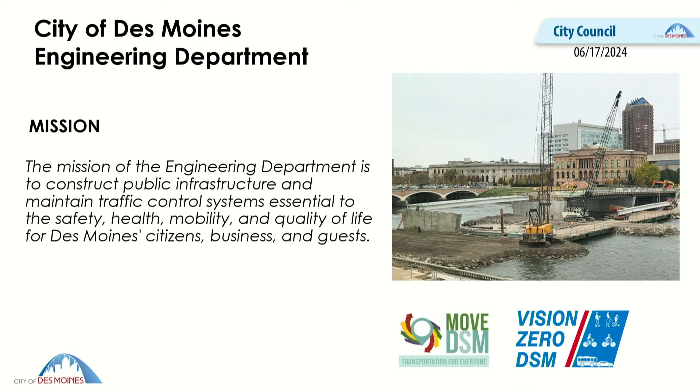We've got 101 staff, divided into 3 divisions: traffic and transportation, design and construction, and contracts and real estate.

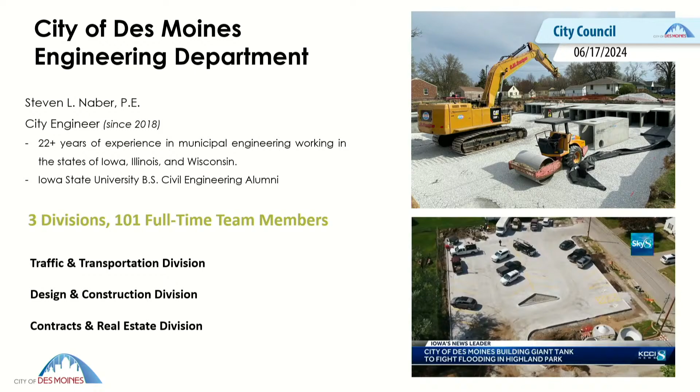Our traffic and transportation division is about 40% of the group. They focus on the planning, programming, and engineering side of things, from doing engineering studies, traffic signal timing and operations, and managing things like our traffic calming program. Notably, MOVE DSM, our transportation master plan, as well as Vision Zero, our safety action plan.

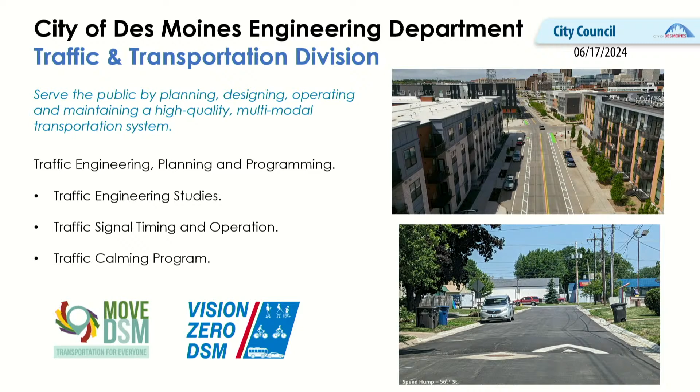We've also got a team involved with our permit development center doing site plan reviews from a traffic standpoint. We don't manage street use events, but we have traffic folks involved when street use events involve street closures, helping work on detours. We respond to about 200 vision obstruction complaints a year, when folks pull up at an intersection and have trouble seeing. We have folks go out and work with property owners to mitigate. And on our main city website, we have a thing called Find Closures, where folks can see where street closures are. We have team members managing that as well.

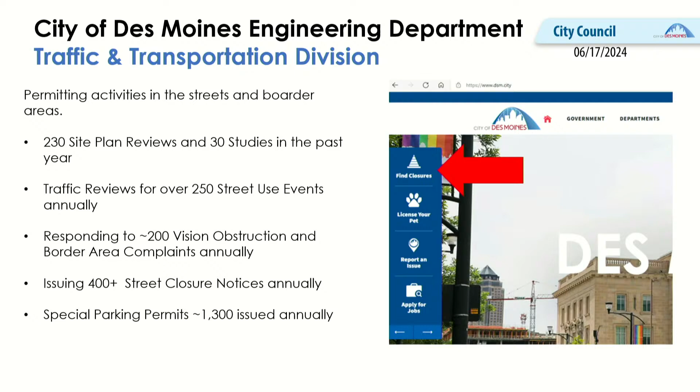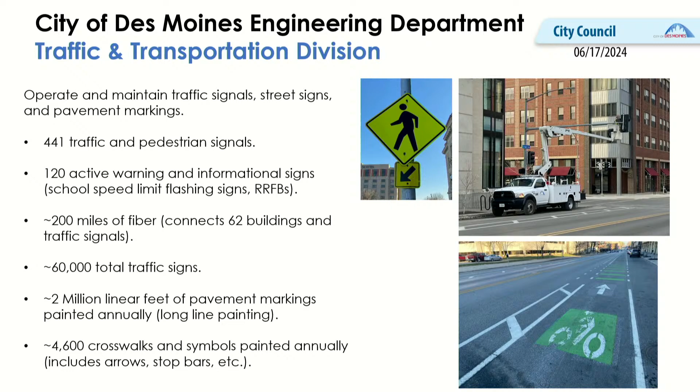We also have a large team of folks out maintaining the infrastructure itself, from 441 traffic and pedestrian signals, to 120 active informational signs. We've got 200 miles of fiber, 60,000 signs, 2 million feet of pavement markings, and 4,600 crosswalks and symbols that we all paint every year. So team members are out doing that within our department.

Also, we have the parking systems. That includes 3,400 on-street metered parking spaces, as well as the 7 parking garages. Plus we are leasing a parking garage floor at East 4th in Des Moines, and also managing the city skywalk pieces, the skywalk corridor.

The pieces that go through the private buildings are privately maintained, but we as a city have the stuff over the public right of way, like the bridges, and then we also have some skywalks that go through our parking garages that we're responsible for as well.

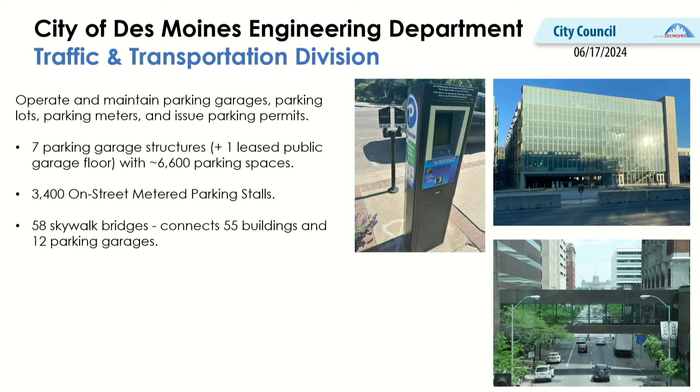Our design and construction division works like a consultant to the rest of the city. For example, if our parks department wants to build a spray ground, our parks department will plan it out and give the vision for it. Then our team will actually do the detailed design, prepare the construction design documents, bidding documents, design it, bid it, and build it, overseeing the construction as well. So that's one example.

If our public works department has a flooding issue they want to address, or maybe they want to provide sewer service to a certain part of the city that isn't there, they would say we want to provide sewer service here to this area, and then we would go through and design and size the sewer accordingly to that area, and oversee the construction as well.

So, do you charge each department when you do those types of services, like for parks and public works? Do you charge back to the other departments? That's a great question, Councilman Gatto is right.

Actually, this whole staff right here charges to the capital improvement program. So when we have a page, say for McKinley Avenue reconstruction, our team members are part of that budget, charging to the CIP. So if there's a spray ground page in our CIP, they're charging to that as well, to the project.

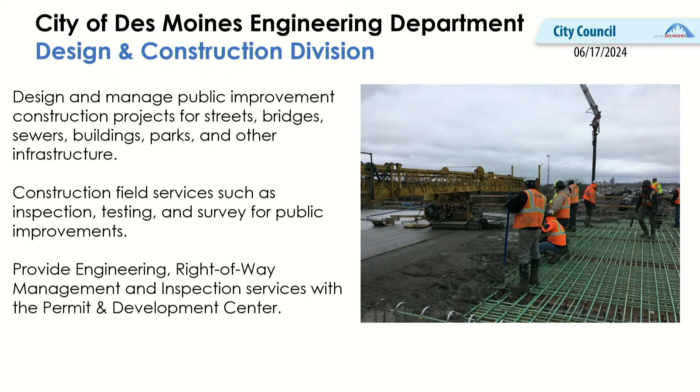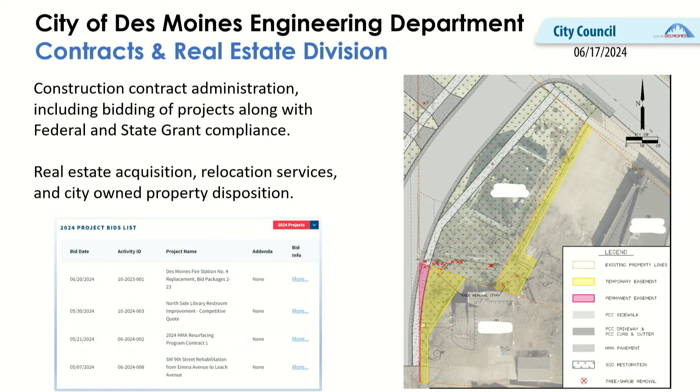We also have a real estate division that handles easements or permanent acquisitions, or even dispositions. You'll see on your agendas a lot of times we have alleyways that are platted on paper, but there's not really an alley there, so residents want to buy it, and we handle that process as well.

Okay, so just a little bit over our process. I do want to point out to our residents, if you go right on the main page, in addition to finding closures, you can also click on the projects map, and that is our city capital improvement projects. It's also on the engineering page, but obviously it's easier to find on the front page.

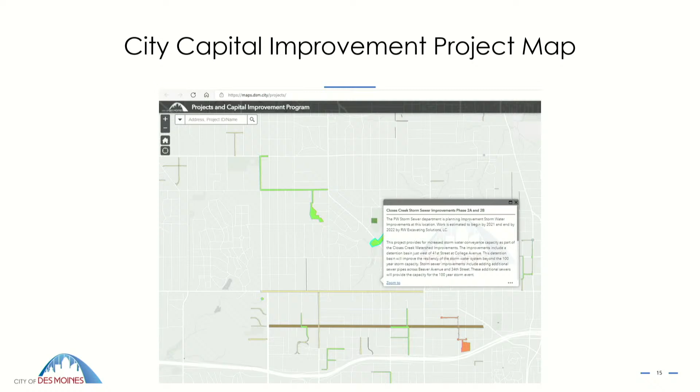That'll take you to a map that looks like this, and you can type in your address in the upper left-hand corner, and then it takes you to something like this, and you can click on these little icons and it pulls up what the project is. It tells you a little bit about it, as well as, I know this is tough to read with the white, who to contact directly, and even the reference to the capital improvement page from our CIP, so folks can see how it's funded.

So this is an older graphic, but I've always liked it for how a project gets completed. We hear from our residents. We have our budget process that goes from the fall into the early year and winter. Our council receives feedback from our residents. We've got PlanDSM, our comprehensive plan which is our vision, and GuideDSM which is our strategic plan. Those are the vision and strategic plan we use, and what I call implementation plans, such as MoveDSM, our transportation master plan, and our parks master plan.

We have neighborhood plans, and plans such as, I'll show you one example, our plan to maintain the parking garage structures. So those are what I call implementation plans. And then those are used by what I would call programmers. Our programmers are responsible for bringing forth projects from all that feedback from those plans and presenting them during the budget process that starts in the fall.

And then that all funnels into our city manager and finance office, who look at all the finances and figure out what we can do. Then, as you know, the city manager presents the budget in the early part of the year, and then it's ultimately approved, typically in March. This year it was in April because of a change from our legislature in when that was approved. So that's in general how a project is brought forth, and you can see all the different departments that are considered programmers that bring forth projects.

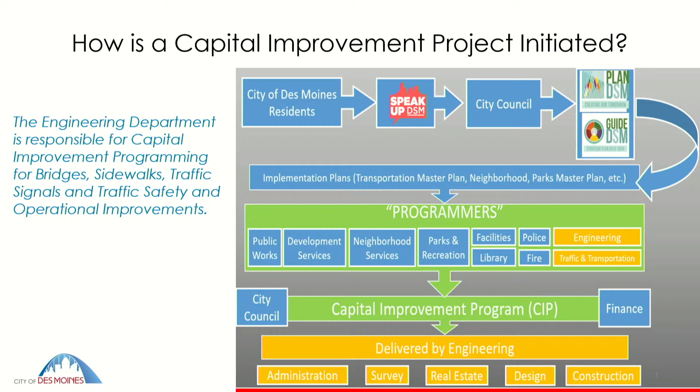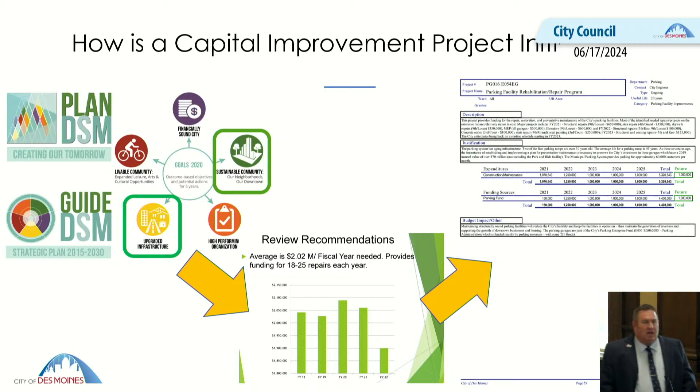So just an example, I mentioned this before. We have our strategic plan that we want upgraded infrastructure, we want to maintain our infrastructure. We had done an overarching implementation plan for how we maintain our parking garages structurally, and then we use that plan to put money in the CIP in the parking facility rehabilitation repair program, and that's how we come up with our budget and what we're doing. Then, of course, you'll see projects that come out of that. So this is just an example overview of how projects are created.

Then once we get a project in the capital improvement program, there's quite a process from there. Our city council adopts the capital improvement program every year and approves it. Then once we get a project, we finalize the scope and start the engineering process, assemble a project team. If there are private consultants needed for specialty work, or due to a workload effort, then we might bring a private consultant on. Then we have some preliminary engineering, environmental work, survey work, and there could be real estate actions needed as well.

Ultimately we follow state code in how we bid projects. We're required to order construction, our city council is required to order construction. We have our bidding process, and then we have a hearing to award the construction contract. So you can see the different touch points throughout a project, and then ultimately we build it, and then we have to accept it as well.

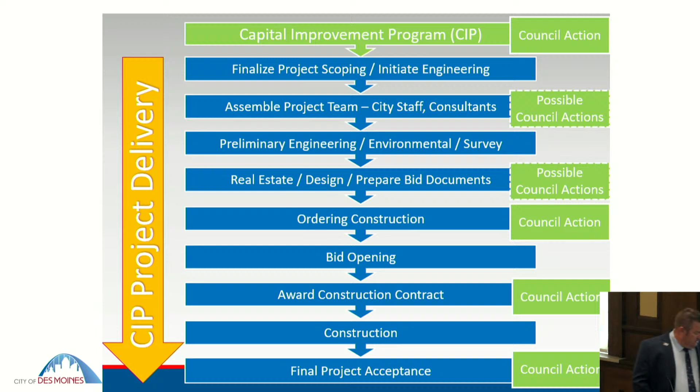Our bidding process isn't short. This is a schedule I put out to our team for where our milestones are, since we have to hit certain bid dates. Essentially there's two months of bidding, and then if there's real estate involved, it typically takes about six months to go through real estate. So that's eight months, I'd say, from final design. If you have a final design and we have plats and know we need right-of-way or easements, it's going to take us at least eight months from that process as well.

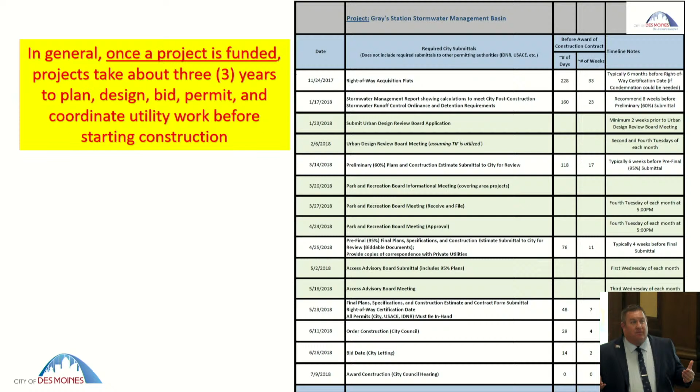This is not this table, I just pulled it as an example and I expect no one to read it. But what I wanted to show you is it's actually a schedule for the Gray's Station stormwater wetland basin.

Some folks might say, well, you're digging out a hole and then seeding it with wetlands, but for that wetland alone we had real estate involved because we had property transfers. We went through Urban Design Review Board, Parks and Recreation Board, and Access Advisory Board because we've got a trail around there. So there's a number of submittals and processes throughout what some might think is a simple project, and that's 33 weeks of going through that.

In general, the rule of thumb, and I've worked through communities across the Midwest, Illinois and Wisconsin, 3 years is generally what it takes to design, bid and build and permit a project, and coordinate utility work. So once a project's funded, generally 3 years is kind of the normal rule of thumb. Can we do it faster? Absolutely. Can projects take longer? If they're more complex, certainly they can. But that's the general rule of thumb.

You don't think this is maybe a little excessive for projects, with all these steps in here? Maybe we can simplify it a little bit, or cut some of these steps out, cut some of the red tape out, so we can actually internally do things a little bit quicker?

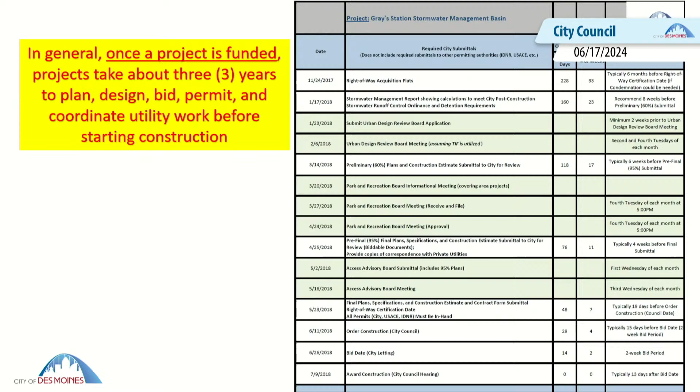But between all the boards, you're talking, they basically could do it at the same time, right? Correct. So you've got 3 months from February through May that we're waiting to get to a board. Yeah, I'm looking at this, that's what I'm going through internally. What the general public is going to have to go through, they're going through all of these steps, might seem just slightly excessive, but that's my internal opinion. Outside we're obviously going through the same thing, which seems a little much for some simpler projects.

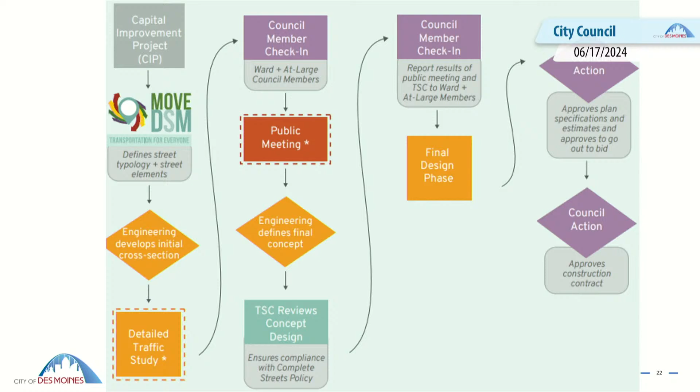This graphic is taken from Move DSM, our Transportation Master Plan. From our public process, it's always beneficial to get out to the public early on in the concept stage, before you get into the detailed design where we actually spend a lot of time detailing elevations and storm sewer sizing and all those construction documents.

We meet with the public early, and you see up there council check-ins. We check in with the ward and at-large council members before we go to the public. So this is our public process for a typical transportation project.

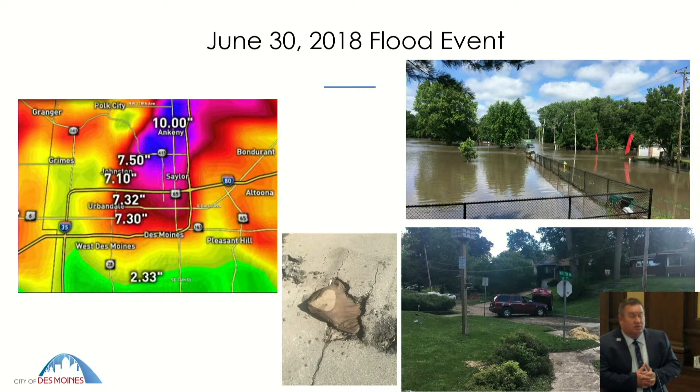So some of the capital improvement program highlights. This graphic, a lot of us remember, right? In June 30th of 2018, the power of water is incredible. Those cars obviously did not park that way.

That couch cushion - the water actually picked up the asphalt overlay, so it kind of created a wave effect, and that couch cushion was out of someone's house and ended up under there. So, a devastating event, to say the least.

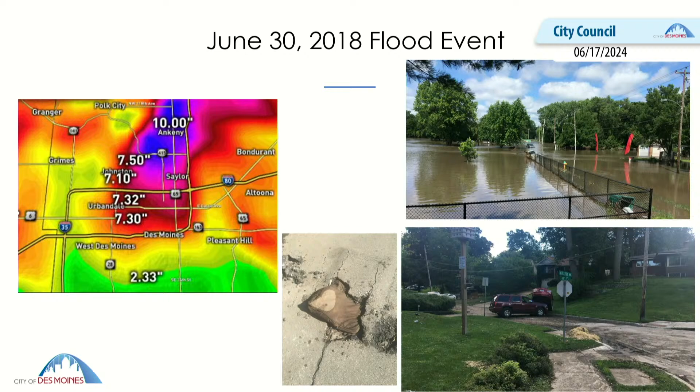In response, our council injected, I think it was 25 million in the range of stormwater money, to attack this. We set a goal to basically go from the downhill portion of Maquoketa Drive up to 47th and Holcomb in 5 years.

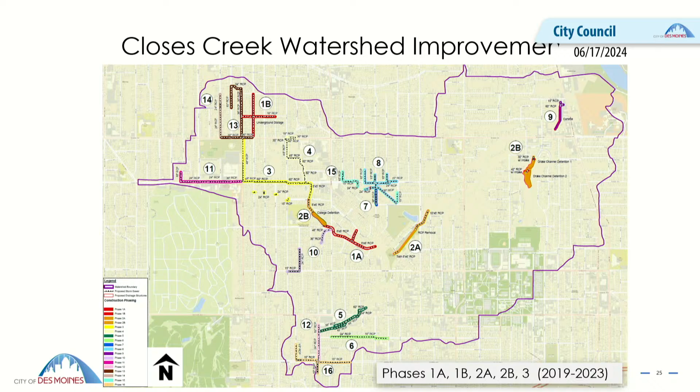So, in 2018, we had a lot of public meetings. I remember a lot of you in the front yards meeting with folks, and that was our goal - we're going to attack this in 5 years and get from Maquoketa Drive to 47th and Holcomb.

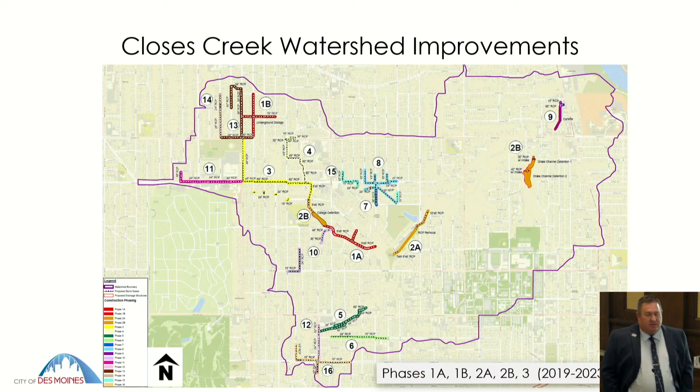And you say, why did we choose that? Well, that's kind of the main artery of this area. So I put these arrows - that is generally where the water is going to the Des Moines River. Our goal was to attack that main artery.

The old plan that was in place for a while was really more focused on conveyance - just conveying a large portion of stormwater. In 2018, when the flood events happened, our public works team and engineering team got in rooms and figured out how to inject detention.

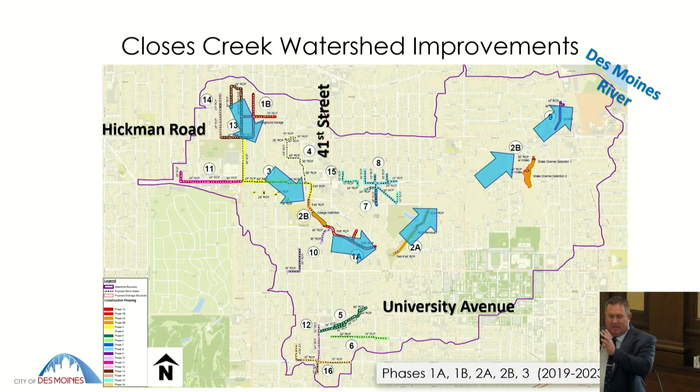What is detention? Well, conveyance is conveying the water. If I dump a small amount of water through a straw, the straw hopefully will convey the water. If I take a big pitcher of water and dump it through a straw, the straw won't be able to handle it, and it floods all over the place. Detention is if I attach the straw to a large bowl and dump the pitcher into the bowl - the bowl will fill up and allow the straw to drain out the water. That's how I've tried to explain stormwater detention.

So we implemented some detention facilities here. One of them is uniquely underneath 47th and Holcomb - these are 12-foot wide by 4-foot chambers underneath the street that actually store water. This was kind of a low area, if you will. So now instead of the water being stored in people's basements and on the street, it's now stored as detention underneath the road.

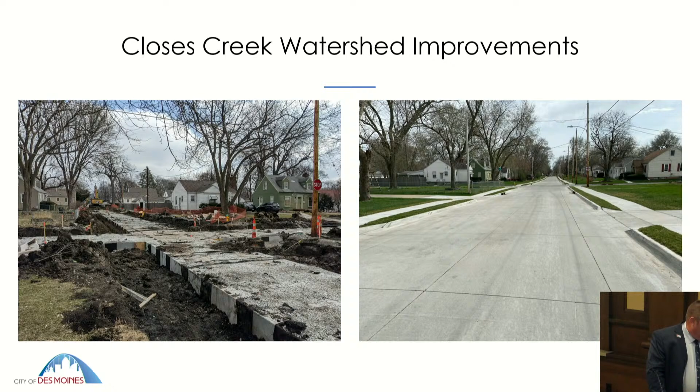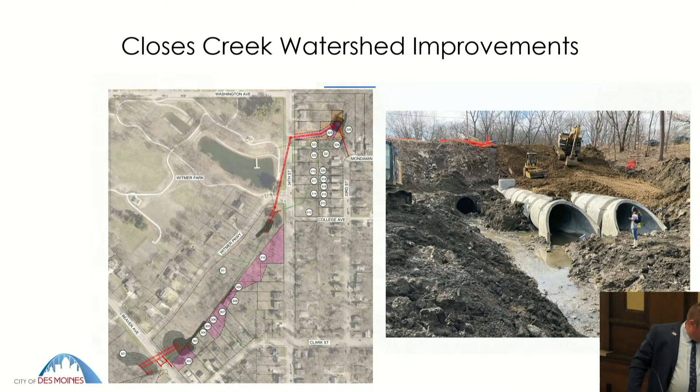And then talking about detention - we actually just got an email from a resident who was really happy about how our public works department is doing more native planting instead of mowing. It used to be just turf grass for detention basins, and they would spend money mowing them. Instead, we've switched to more native plantings, and I got an email from a resident so happy to see all the plantings that have bloomed in this stormwater detention basin at 41st and College.

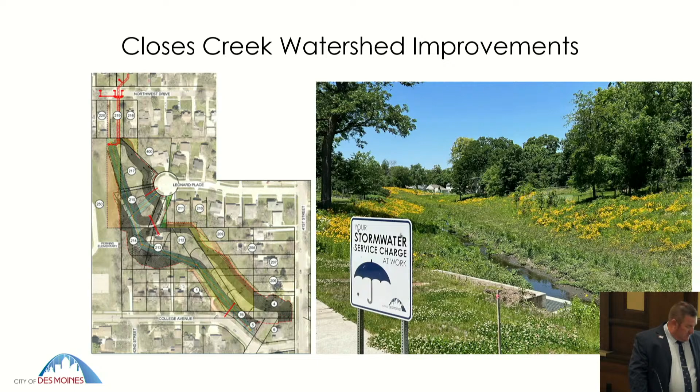Hamilton Drain, again, this is a similar concept. There was actually an old wood box called the Rocky Place Sewer. In some cases it's about 5 feet by 4 feet wide, and that's what was conveyed. The old wood box was the red line running across the screen there, and that was conveying the stormwater.

In some cases it was in okay condition, other cases it was not. I know Councilmember Westergaard had met with some residents who saw some locations that weren't. And so, of course, when that wood box gets overwhelmed, remember the straw concept, that's where the water's going to go.

This had flooding history enough that FEMA mapped a 22-acre portion of this land as a special flood hazard area, which mandated that if people had a federally backed mortgage, which most mortgages are, they have to get flood insurance, which is not cheap.

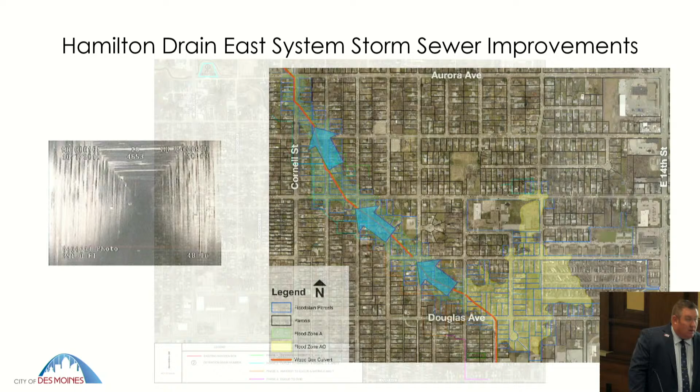Our public works team and engineering team got together, and the old plan was just conveyance, but the old plan wasn't quite reasonable. There were some sections where they had 3 12-foot wide culverts going down a street to convey the stormwater. Well, the street's only 25 feet wide, so that's not really a lot of room for that.

So we switched gears and added more stormwater detention. You can see some of the boxes in that area where we've injected stormwater detention to store water, slowing the rates downstream into the program.

So right here you can see our plan. The green is 100% complete, the blue is substantially completed. Right now we're in phase 3, which is the orange, about 60% complete with those sewers. All we've got left is the pink, which is the Hamilton Drain storm sewer improvements. There used to be a county drainage district called Hamilton Drain. It no longer exists, but we've kept the name for the drainage purposes.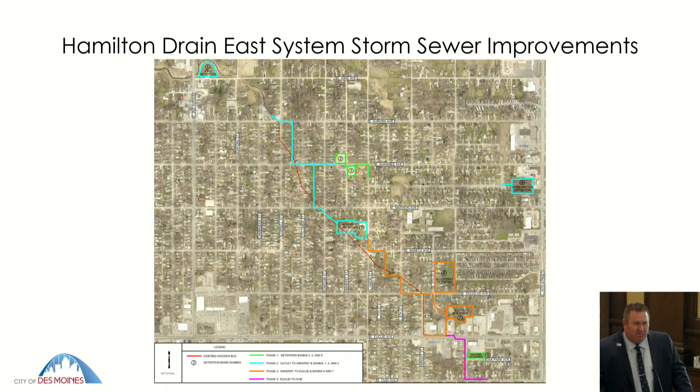Again, we had to get creative. There's not a lot of green space in our more established neighborhoods, so here there's actually 2 big parking lots that a church had. We worked with them and said, hey, you get brand new parking lots if you let us store 1 million gallons of stormwater underneath them. There obviously are easements there so they won't build buildings there, but churches generally will stay in that land use, so those parking lots, they got new parking lots.

With it, we also were able to clean up sidewalks. There actually wasn't a lot of sidewalks in this area, there were a lot of sidewalk gaps, so we're able to clean up this whole area with this project, as well as put in a huge amount of storage facilities.

We've also been working on flood mitigation along our rivers as well. This is our plan for the flood mitigation program, levee alterations program. We've been funding a lot of that with state tax money from the flood mitigation program through the state. The green, phase A, was complete, and I'll show some graphics of that in a bit. That's basically from the confluence on the Des Moines River upstream to just north of about where we are.

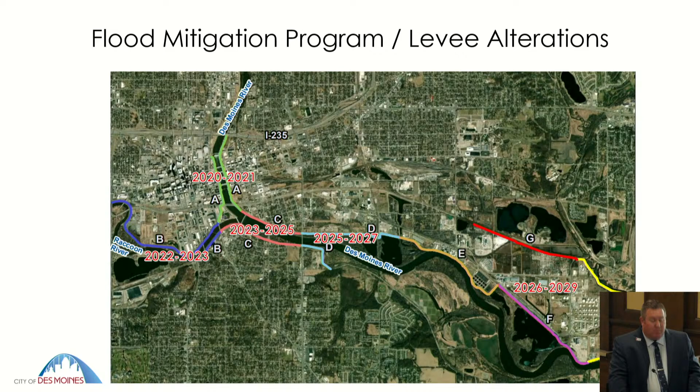We've also got phase B in blue, which is about 90% complete. That goes from the confluence upstream of Raccoon. And we're currently under construction, about 50%, maybe a little more complete, with phase C, a large phase from the confluence down to southeast 14th Street. I'll show some graphics of what some of these improvements are here.

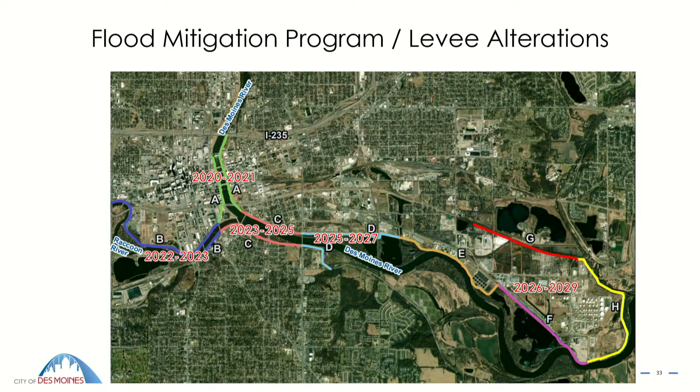Along with some of the phases, we also did some interior drainage work. We've replaced and upgraded a number of pump stations. When we talk about pump stations, we've got the levee system, and if the river's up and it rains behind the levee, we've got to get the water out still.

So this is a neighborhood south of Martin Luther King Jr. Parkway. There was flood history here, so we took some property that wasn't being used, part of it next to Cohen Park, near the fountain that's been there a long time, and put in a stormwater basin. We got together with our parks team, who did an awesome job putting a little sidewalk path around it and making park improvements along there. Not only is that area much safer from a flood mitigation standpoint, but we've got a really cool amenity there planned by our parks team.

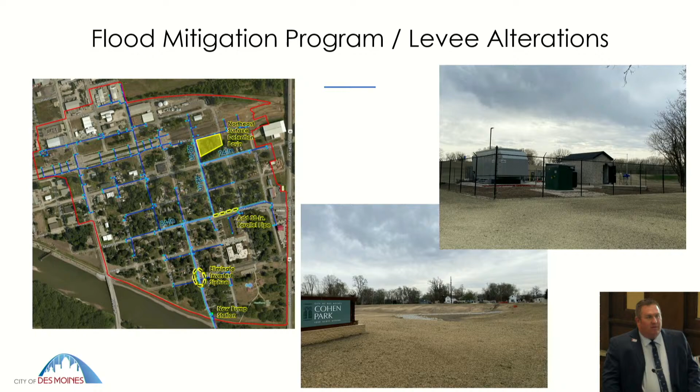We've also done things like levee raises, and the bottom graphic shows what that is. We've elevated our levees and flood walls to have a buffer, or freeboard, above what is considered the special flood hazard event. Typically it's 3 to 4 feet. We actually put in a bit more buffer, adding another 6 inches, or even using the Corps standard, which is the 90% probabilistic event - a modeling accuracy approach they use to set the height.

So we've not only raised our levees - you can see on the left that's a levee south of Martin Luther King Jr. Parkway - we've also replaced some levees due to condition, that's by the red bridge, Principal Riverwalk Red Bridge there. And we've also just raised some of the walls, putting a cap on the wall to build some of that freeboard.

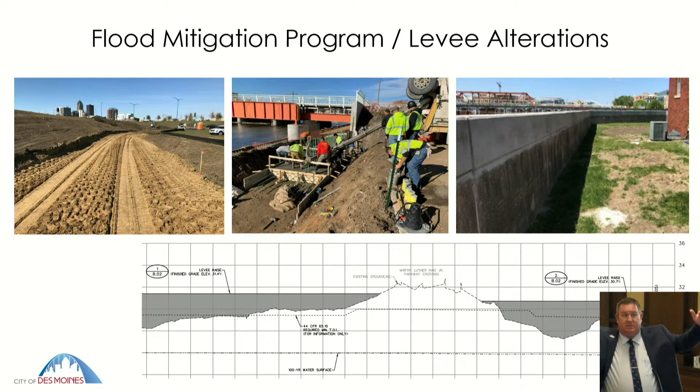This is not only to provide flood mitigation and reduce flood risk, we're also doing this to meet FEMA standards. If we did not make some of these improvements, there was a risk that FEMA would say we don't recognize the flood protection system, that it doesn't meet our standards, and they'd change the classification of the area behind it, considering it a special flood hazard area. So not only is this drastically reducing flood risk through mitigation, it's also reaching FEMA standards, and even exceeding that with some buffer above it. That's why we're doing this.

There are some other improvements here. We talked about gate wells - these are the structures our public works team closes when there's a high flood event, so the river doesn't back up through our storm sewer system.

We've also done some stabilization work - you can see that's on the Iowa Women of Achievement Bridge to armor the banks. So we not only armor the levee system and flood protection system on the front side because our river can cause scouring, we've also done improvements on the back side. There's groundwater that flows underneath the levees, posing a risk for undermining them, so we've done stabilization improvements and seepage drains to pull that pressure out from under there. Again, not just raising the levees, but making them more robust.

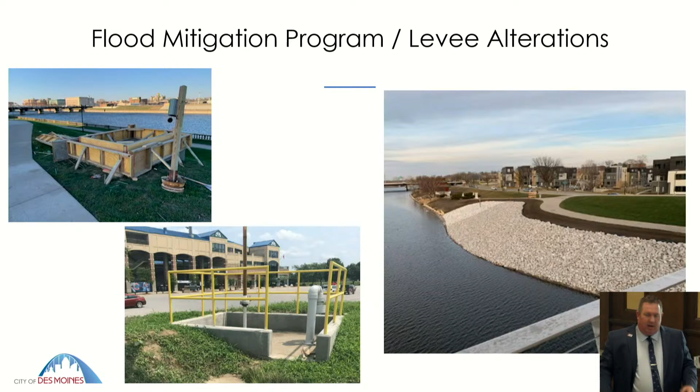Our closures are generally the most at-risk points in our flood protection system. This is our public works team now operating our new closures. The one on the left is the Simon Estes Amphitheater right out our window here, and the one on the right - if you go to an Iowa Cubs game - those walls are closures. You can see that's much quicker to install compared to what we used to do, which was having contractors bring in loads of earth material to close up these areas, which poses a risk from both a time and stability standpoint. So we're hardening these closures.

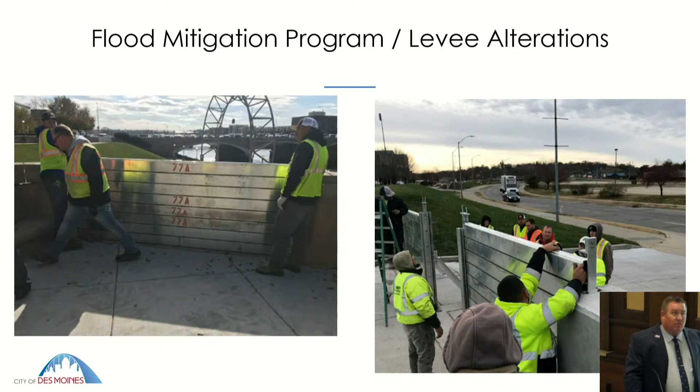We're very proud, as a city whose flag is modeled off of bridges, that our bridges are in great condition. As a statistic, we've replaced or rehabilitated 21 bridges in the past 10 years. We've got 52 of them. In 2013, we had 14 classified as structurally deficient - though I want to point out that doesn't mean they're not safe, it just means elements of the bridge are in poor condition. That's just a metric structural engineers use to classify bridges.

In 2024, we're down to 2, and one of them is Walnut, so I guess that one's gone - maybe it should be 1 right now. The other one is the Raccoon River Bridge, which we have in the CIP.

I should have probably not changed the numbers until we've actually replaced it and finished the project. So, I guess in hindsight, I shouldn't have.

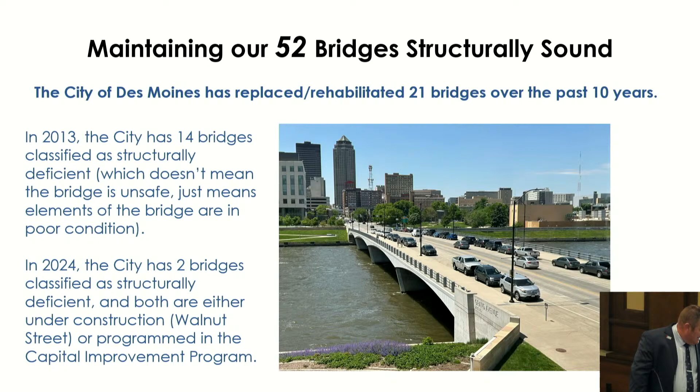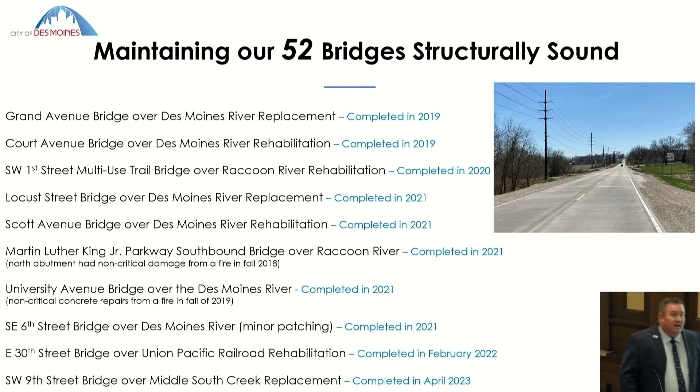Here's just a snapshot of all those bridges we've worked on in the past 5 years: Grand Avenue, Court Avenue, Southwest First, Locust, Scott, Martin Luther King Jr. Parkway, University, Southeast 6th, East 30th over by the fairgrounds, and Southwest 9th, all done in the past 5 years. We've also got some real recent ones, 2nd Avenue with 2 bridges there, Southwest 8th Viaduct in 2023, and Southwest 9th is coming. Guthrie Avenue is planned for 2025, Walnut's under construction, and then we've got Fleur Drive, as I mentioned before, in our capital improvement program as well.

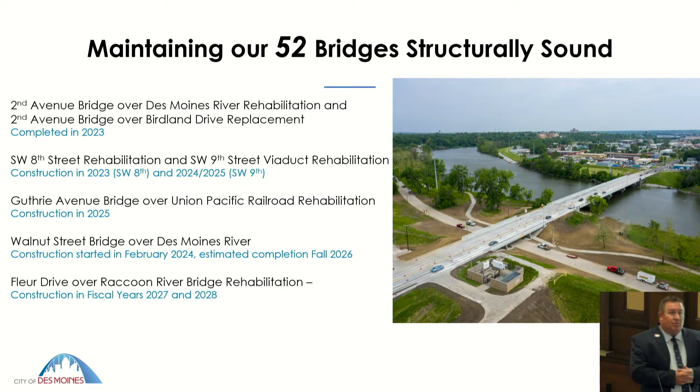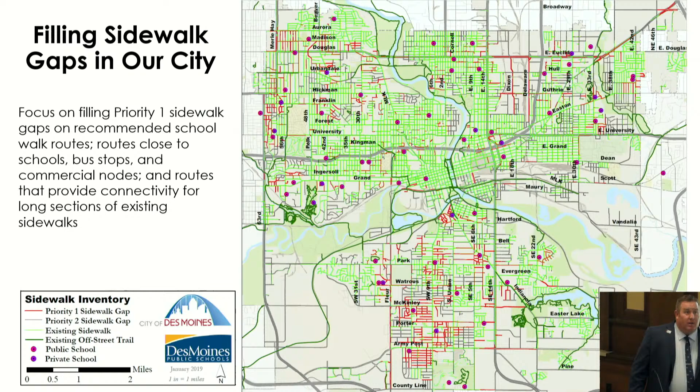Sidewalks, this was the start of it. We moved through DSM and laid out what we consider priority 1 sidewalks, those on recommended school routes, connecting to bus stops, commercial nodes, and long connections. This was a map across DSM, and the red areas are what we call priority 1 gaps. You can see some parts of our city obviously have more than others. So we put together a plan to attack those, creating a phasing effect.

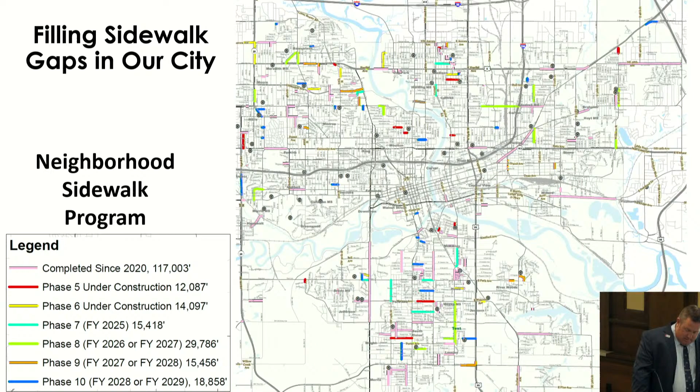I think this is kind of the overarching CIP, and I gave this slide a few weeks ago. Since then, we've made quite a bit of progress, over 27 miles in the past 5 years. And what's underway, under contract, or getting ready to bid, we're looking to be at 31 miles by fiscal year 2025.

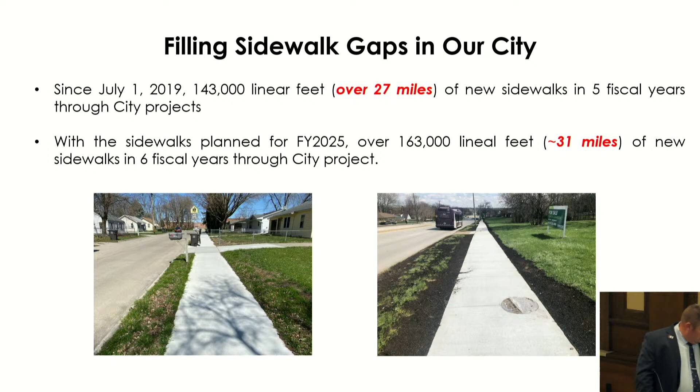To put that in perspective, if we keep on that pace, how long is it going to take us to get through the priority 1 sidewalks? Well, that would average about 5.5 miles a year, and we have about 180 miles total. So that works out to about 32 or 33 years.

So now we're talking about streets. This was Hubbell Avenue in 2017. You can see there were some obscure intersections. At the time, it was ranked number 4 in the state from a crash history standpoint on the state's list. You can see the obscure intersections, like at the top right, where if you're on East 38th or East Douglas, you could go to this weird intersection turning at an angle, or go up to East 38th to the north.

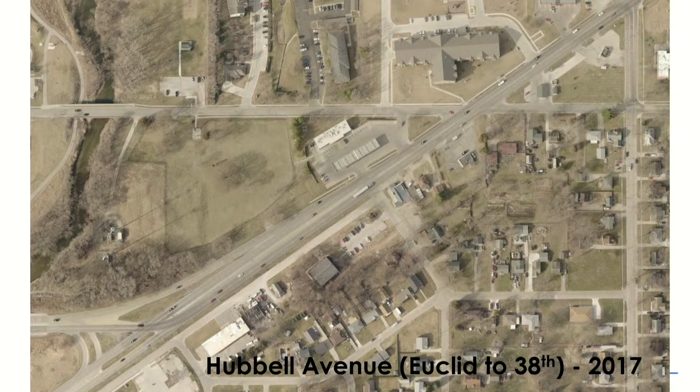Euclid also came in at a unique intersection. One of the challenges, to be honest, was access management. If you were at a gas pump at the QuikTrip, you could just leave your pump and go straight out, making a left-hand turn, which people did. It was not even a comfortable intersection to drive. Full disclosure, I live over in this area on Hull Avenue.

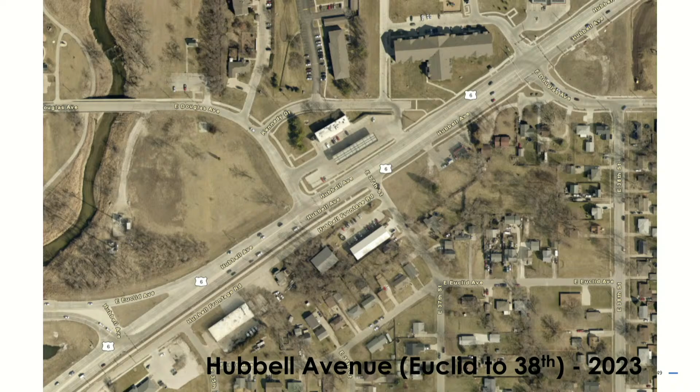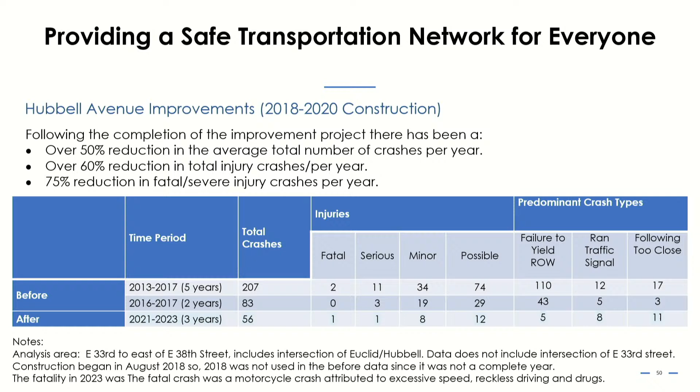And then the better part is the data. When we collected data before and after, we saw a 50% reduction in the total number of crashes, a 60% reduction in total injuries, and a 75% reduction in fatal or severe injury crashes overall. So I'd say that's a pretty successful project, and if you drive through the area, I think people definitely like it a lot better. Even the QuikTrip folks like it a lot better, to say the least.

Okay, so just an update on some of our larger corridor projects. Ingersoll Avenue phases 1 through 3 are done. Phase 4 is well underway and scheduled to be completed in the spring of 2025. Phase 5, from 31st to 35th, is scheduled for 26-27, and the final phase 6 would be 28-29, to all line up with the TIF funding, the tax increment financing set up to fund this.

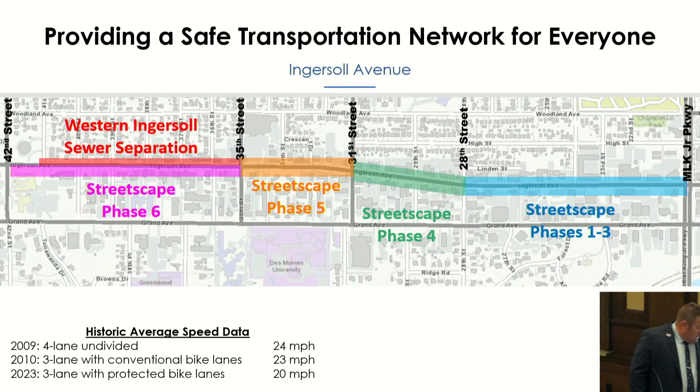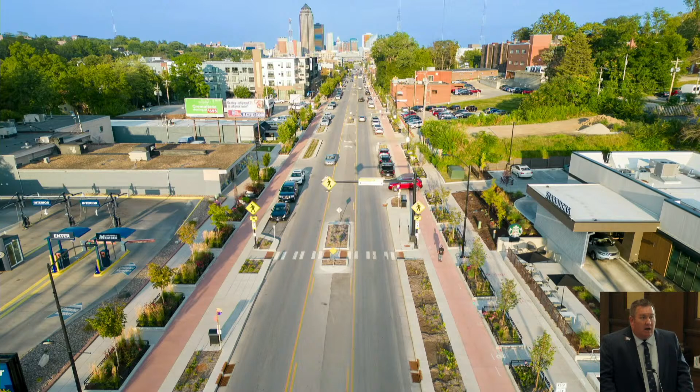Just below shows some speed characteristics there. The impetus for this is a lot of things. One, we've got dated infrastructure. The road itself was in poor condition. The pieces that aren't done, it is in poor condition. It's failing, so we need to completely replace the infrastructure from the dirt up.

Since we're doing that, we're also replacing a lot of the utility work underneath there. We have been finding lead services, so we have been replacing those lead service pipes to the businesses as we find them. We've been upgrading stormwater infrastructure, and the parking areas, you see how they're a different shade - those are brick pavers. The water is designed so it goes through the seams of the brick pavers and promotes groundwater infiltration and reduces that stormwater runoff.

I used to live over this area as well, and I remember when it rains, the water runs in a very sheet flow manner down the streets, I guess if I can word it that way. So we want to try and reduce that runoff, in addition to making this corridor safer for those that live and work and walk and play here.

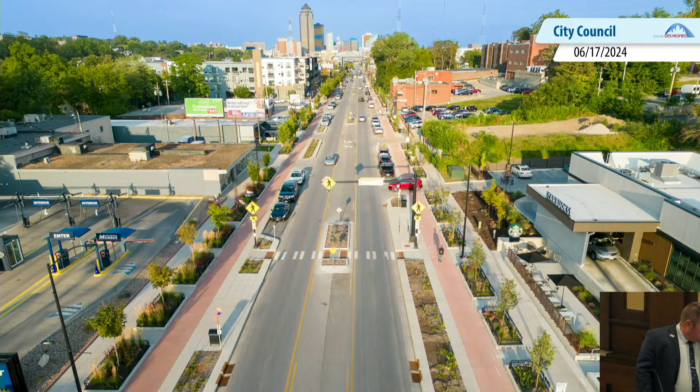So just another example - this was 2020 of Ingersoll Avenue between 24th and 28th Street. You can see the street width there. And here's today. Again, think about where's an area that's safer for all users, where's an area that you want to be. This, in my opinion, definitely makes it a lot safer, especially for pedestrians and folks in this area.

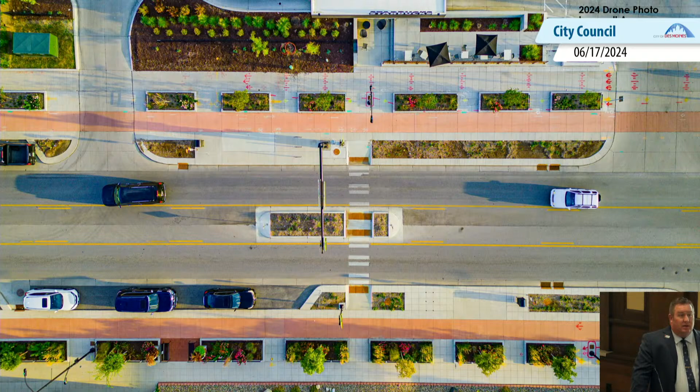And then we get the questions. I just want to show this when you think about design concepts, because it's a question that comes up a lot - why are there these curb extensions and bump outs? Why is there not a parking space right next to the driveway? It's not only for pedestrians and bicyclists and transit users, it's for the motorists as well, to see as they're exiting the driveway.

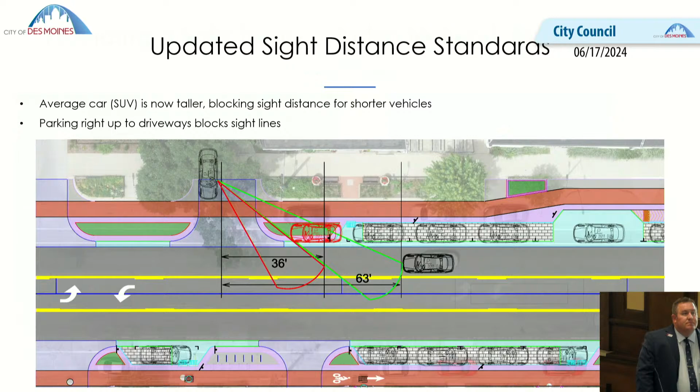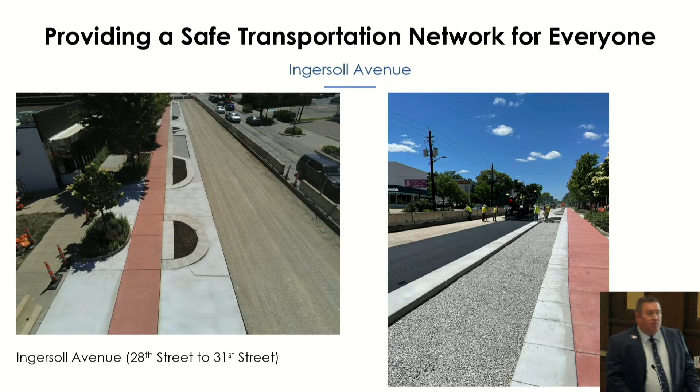And if you go out there today, this is kind of what it looks like. They pretty much got the east side done from 28th to 29th. They flipped over and they're working on the west side from 28th to 29th, and also working from 29th to 31st on the east side. This work is well underway - I think it will be completed, in my opinion, ahead of the spring, the May 2025 completion date, but that's the ultimate completion date for that phase.

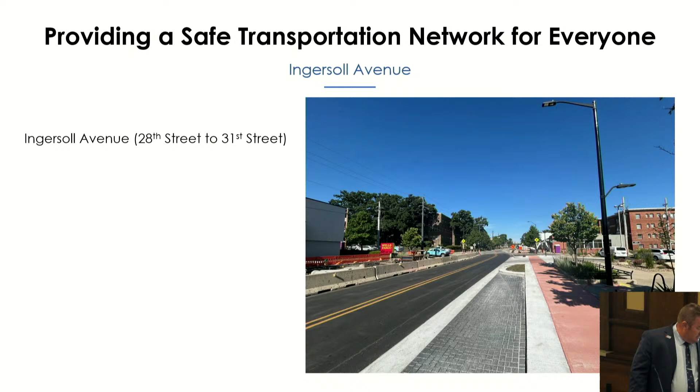University Avenue is another corridor that started back in 2018, 2019. We had public meetings regarding the section from 48th to 63rd - really the area in front of Windsor Elementary was the focus. Residents, of course, came to those public meetings and said, well, what about the rest of the corridor? At the same time, Drake University had a streetscape planned from 25th to 31st, and we had our sewer separation project planned in that same area. So that's why you folks saw 48th to 63rd done - that was what was in the CIP and also related to Windsor Elementary. And 25th to 31st was related to the Drake streetscape project and the sewer separation.

So right now, we're working on filling that middle gap between 31st and 48th. This picture was taken - we can see the library in the background there for a reference point. You can see it's a 3-lane cross section there; it used to be a 4-lane undivided roadway.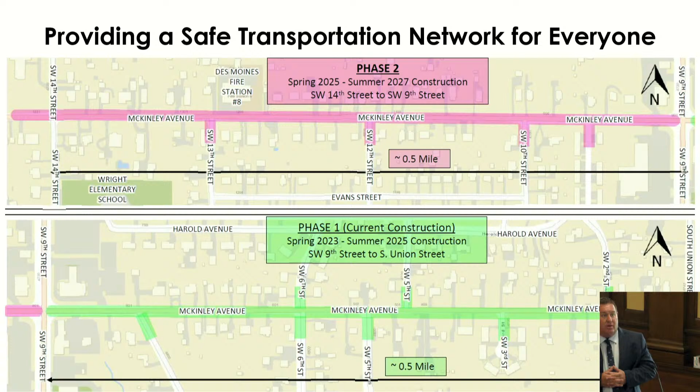Another very similar situation on McKinley Avenue. We've got a roadway with no curbs, not much drainage, no sidewalks or little sidewalks with gaps, and a road that's not in great condition.

We've started working right now between Southwest 9th and South Union, again a complete reconstruction to replace the roadway at full depth, putting in curbs and gutters, sidewalks, and storm sewers as well. The phase ongoing now, spring of 23 to summer 2025, is under construction, and the next phase starts spring of 25 with water main and utility work, going through summer of 27, from Southwest 9th to Southwest 14th.

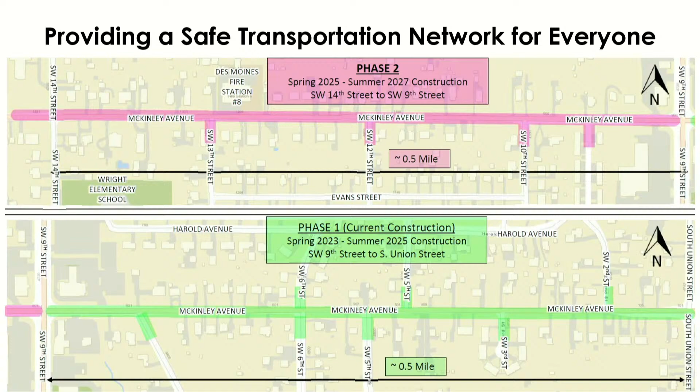So here's what it looked like when we went out there, roughly Tuesday or Wednesday. Between South Union and Southwest 9th, you can see the main line paving is done, going up the hill from essentially Southwest 8th.

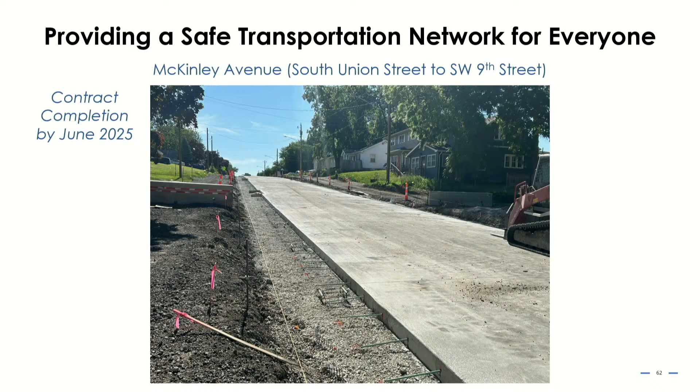This is the section that's scheduled next. You're looking at water main installation and utility relocations in spring 2025, then storm sewer and pavement reconstruction in 26 and 27.

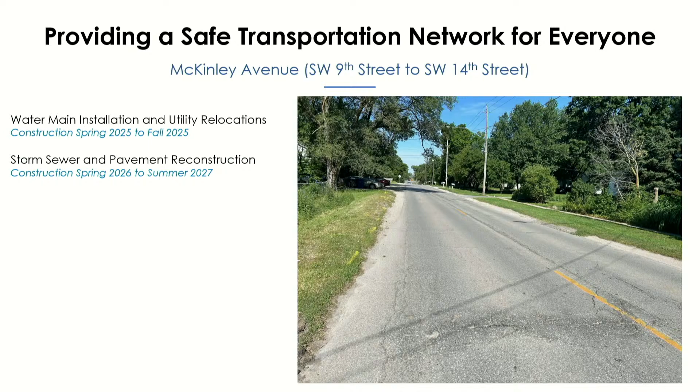Fleur Drive has been under construction for a while. It's a large project, full reconstruction. Since we're doing full reconstruction, the team at Des Moines Waterworks said they want to replace the water mains, and we also wanted to upgrade the storm sewer infrastructure. We decided we're also going to fill the sidewalk gaps.

We are going to resurface Fleur Drive from McKinley down to Army Post later this summer. That work will continue through the fall for Fleur Drive, but that is the last of the scheduled full reconstruction work. Maybe we could have a party after this is all done for the people who live along there.

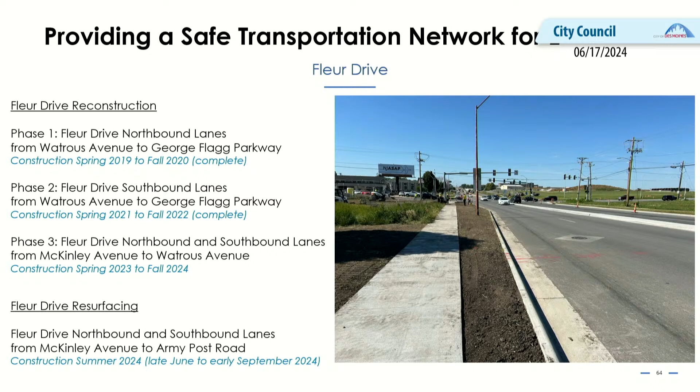That's a good question. That project is not a complete reconstruction, not the same as the others, but we are going to repair some of the failed sections of curbs along the stretch of roadway. We'll also do base patching and repair isolated sections of failed areas, then mill 2 inches and put 2 inches back. So there will be base repairs, but in spot locations.

So that's McKinley? Sorry, that's McKinley, the Fleur Drive from McKinley to Army Post.

I've asked you this question, and I've had this question asked. On McKinley we're doing concrete, on Fleur Drive we did blacktop. South Union, Southeast Fifth, we did blacktop, but now we're doing concrete on McKinley. Can you educate us a little bit on why we do one and then turn around a year later and do another one? Great question. Second Avenue is full asphalt as well.

There's a number of factors that go into it. Indianola was concrete.

Some of it is we can design full depth, what we call perpetual pavements. Perpetual pavements are roads that we're not going to have to reconstruct, like Fleur Drive, again in my lifetime. That's not to say it won't need maintenance. We may need to mill 2 inches and put 2 inches back in so many years, or a concrete street will still need some joints patched and repaired. All roads will need maintenance, but when we build a perpetual pavement, that's building it with a base, with under drains, you'll see us putting pipes along the sides of the road to drain the water out from under the road. We can build perpetual pavements with both asphalt and concrete.

Here's a photograph of 2nd Avenue taken last week. A lot of progress has been made there. Since we're reconstructing the road, Des Moines Waterworks wanted to get in and do the water main replacement. We also had a large sewer related to sewer separation efforts on one side of the road. They've done the sewer on the east side, but the big sewer is on the west side. This is them working along the east side doing water service connections and water main work, so they're working on the north half of this project. The completion date is fall of 2026.

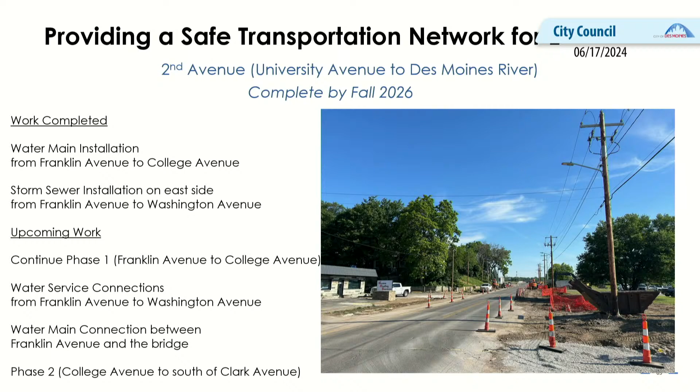What's on the horizon? You've heard a lot of the news on the Southeast Connector, right? We got $34 million in federal discretionary grant funding there. On the US 69 corridor, we're working on the design with the DOT on the first project at Southeast 14th and Maury, unfortunately one of those intersections highly ranked in the state for crash history. We're going to do a similar concept to what was done at Hubbell, realigning the intersections there.

East Army Post Road Corridor is another one. On the question about money, some of you have been involved as MPO chair there. We've been piling up MPO federal funds for East Army Post Road, a corridor experiencing a lot of development. It's a rural roadway with no sidewalk facilities, no curbs, and this project would reconstruct that road.

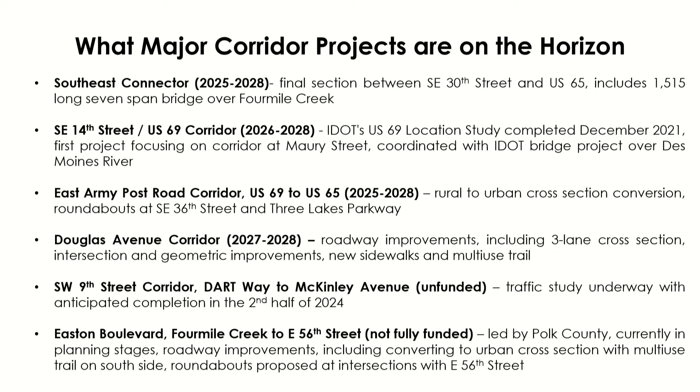The Douglas Avenue corridor has been in the works to improve that corridor. On Southwest 9th, there's a traffic study underway that's scheduled to be completed later this year. Easton Boulevard is one that's not fully funded, but the county has shown a lot of desire to improve that road from 4 Mile to East 56, and they have design concepts they've started developing. So I wanted to give you a snapshot of some of those corridors to watch for large projects that are coming.

We're already doing Emma to Leach on Southwest 9th, which is part of that stretch under the traffic study, and that's more to mill and resurface that roadway. It just can't wait for the full funding—most of it can't wait. At least doing that section now makes sense.

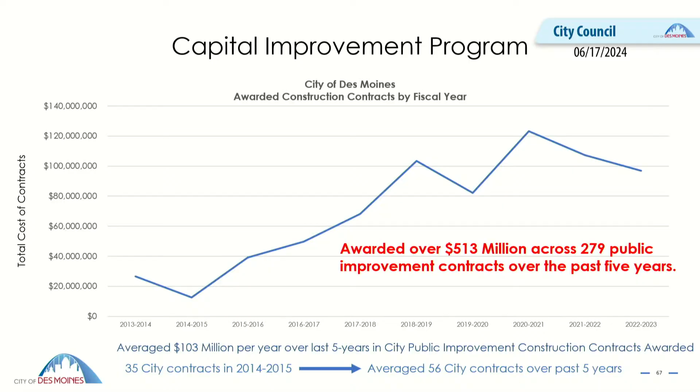Significantly higher than where we were in the early 2010s. Correct, but not the record amount that we've seen the last 5 years.

A large portion of that goes back to the referendum on the sales tax, and how critical that is, because it's not only funding that, but maintaining our tax rate at the same rate after you had lowered it upon passage. So it's been a pretty incredible tool to have. A lot of the critical work has gotten done—major roadways, storm sewer. Not that we don't have a lot more, we still have a lot more to do, but we've taken care of a lot of major areas.

So go ahead, Linda. I've said this before, and I just want to say, Steve, you and your whole department do a fantastic job. You come to neighborhood meetings, I see the interaction, I see how sometimes neighborhoods are a little tough on you, and you do such a great job. Every time somebody calls, I call, your departments are just doing a great job, so thank you. Appreciate that.